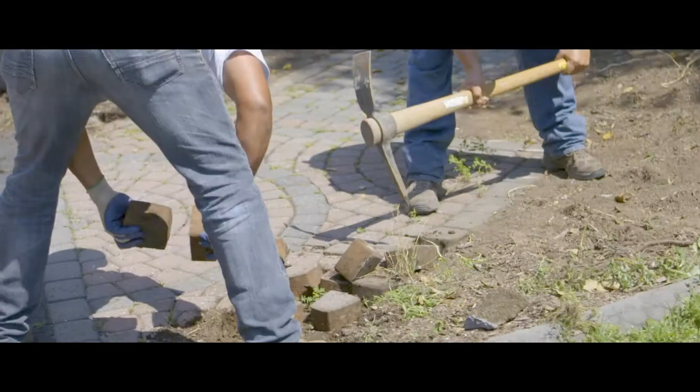We're going to begin with demolition and excavation and get this job rolling. All right, fired up.

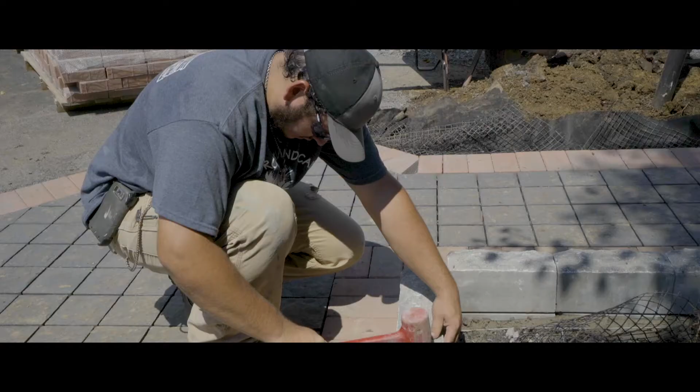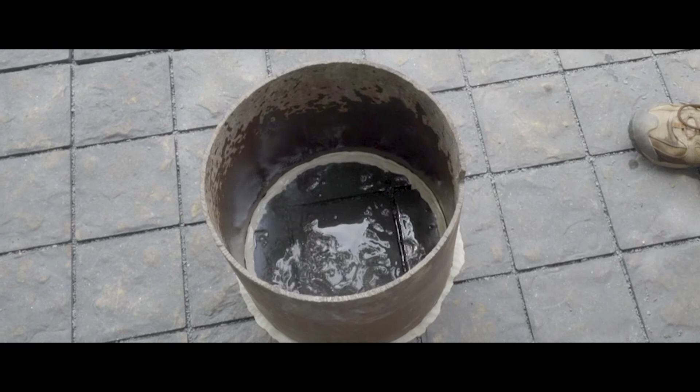You're sitting in the audience, you're thinking, oh my God, they're going to talk about permeable pavements again. Are you kidding me? We can't sell permeable pavements in our market. Why are they talking about it again? Well, let me give you some advice. Stop trying to sell permeable pavements. Just stop. Get to the explicit need. Talk to your consumers about their problems.

I sat with this lady in Reading, Pennsylvania, and I said, how can I help you? She said, I walk off of my front porch, I step onto the walkway either into water or ice. Can you solve that for me, Paver Pete? Yes, ma'am. She points to this tree in her front yard, and she says, this tree has no value to anyone other than us, because we planted it, our kids, us, we planted it together. I would like to save the tree. Can you save the tree, Paver Pete?

Yes, ma'am. She goes, it's summertime. I would love for you guys to be out of my front yard really quickly. Can you do that for me? I said, yes, ma'am. And I did it with permeable pavement. I was in and out with the walkway installation in one day. All the plantings took us a second day, 2 days, in and out. We solved all her drainage problems, and we preserved her tree, and we did it with permeable pavement.

I didn't sit down and discuss angular stone with 90% fractured face, less than 5% passing the two hundred. Because she doesn't care. She doesn't. Can you solve my drainage problem? Yes. Can you save my tree? Yes. Can you be in and out in a day or two? Yes. That's permeable pavement, folks.

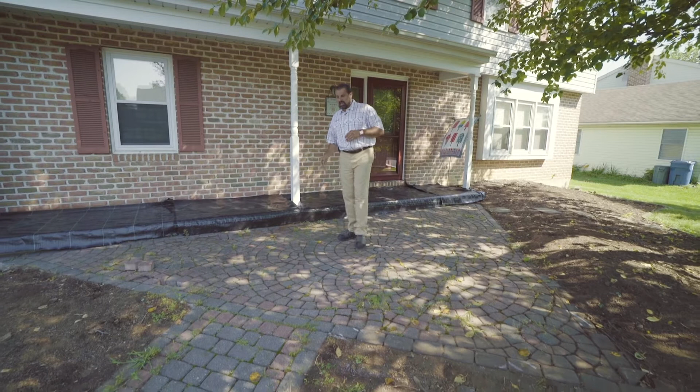The contractor loves that. It's busy season, and this walkway, step, and stoop can be done in 1 day's time. An additional day will get all the landscaping done. The layout, we're going to work with our existing grades and pitch that water down, most of it going through the subgrade. You can see some failures around this site. We're going to deal with those.

We have the root zone system over here. We have some edge failure and a couple of fairly significant sinkholes. This was done on all stone dust or screenings or quarry waste, which has eroded away. We're going to solve that problem for them as well. So we're going to start with excavation and demolition and get this job started.

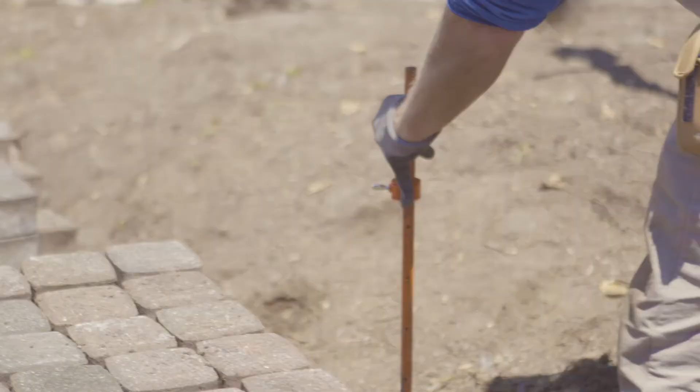How many of you guys have seen things like this on your projects? Put your hands up. How many of you have seen a job like this? All of you, put your hands up. How many of you guys take these pictures of these failures and show them to your homeowners, your prospective clients, and say, buyer beware? Think about that one. How many of you in this room have a section of your website that says, buyer beware?

This kind of work is being done in Connecticut. Can I get an amen? Can I get an amen? And how do we stop it? How do we stop it? We sit at a kitchen table and we try to talk to those homeowners and explain that we'll be different, we'll be better, you pay me more and you'll get more. And they go, you're lying to me, because they don't know you.

Start showing them pictures like this. Don't tell them who did the work. They don't need to know. You don't need to get into that game. But show them these things and say, this is being done. We don't build it this way. This is why it occurred. Here's how we're going to solve it.

Now, we have cross-sections that can help you. We have cross-sections. Everybody has a handout. So this is your typical permeable pavement system crosscut. And obviously in this system, we got to put our 2 and 3 inch ballast stone, because this lady has her pet elephant or her railroad track she wants to build down her front walkway, right?

Yeah, ridiculous. So what we're saying is, let's make that 2 and 3 inch ballast stone optional.

Am I up on the screen? Yes, I am. Excellent. Yep.

So for the first time ever, the industry doesn't say it, none of our competitors say it, no one is saying it, but the 2 to 3 inch ballast stone is an option. We're building a residential walkway in Reading, Pennsylvania. We don't need ballast stone. But what if we did need additional strength? What if we did have to handle repetitive elephant traffic load? That would be crazy, but let's just say, what could we do to make this pavement stronger, Chris?

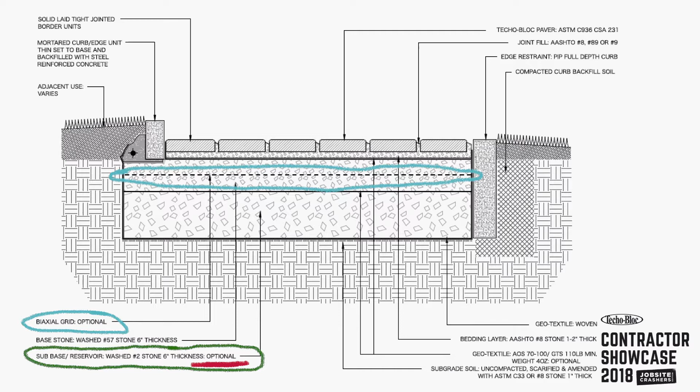We're saying let's integrate some biaxial geogrid into that base to add structural integrity to that system. So sandwiching a layer of biaxial geogrid in our base, we can make this strong enough to handle repetitive vehicular, truck, whatever we wanted to do here. Okay, I like that. Show me another drawing.

Who knows? 50-year storm. 2, 3 inches an hour? No, not much more than that. 50-year storm, what is it? Tell me, I don't know. Huh? Let's say 4 inches an hour. That would be a lot. I think that's too much. But let's say you get a 4-inch rain event. 50-year storm. What's going to happen, Chris?

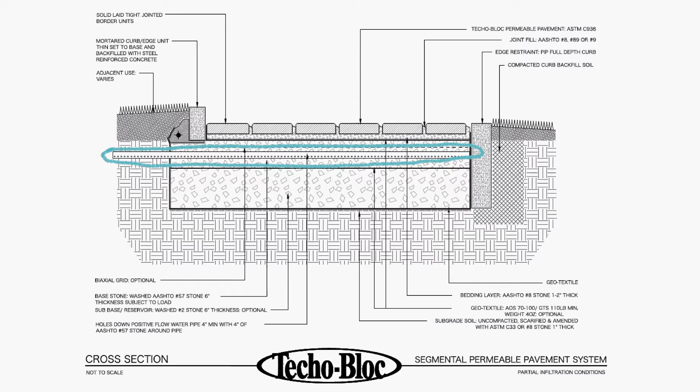We got rain in the environment, right? Rain's coming down. It saturates the joints. It eventually fills into our base, right? That's rain. Is that rain? Those are raindrops. I will take the pen from you. You realize that, rain, right? Okay. And then that water will fill into our subbase or base, and it will infiltrate naturally into the soil. It'll recharge our water table. It'll be absorbed into root matter and evapotranspirate back into the environment.

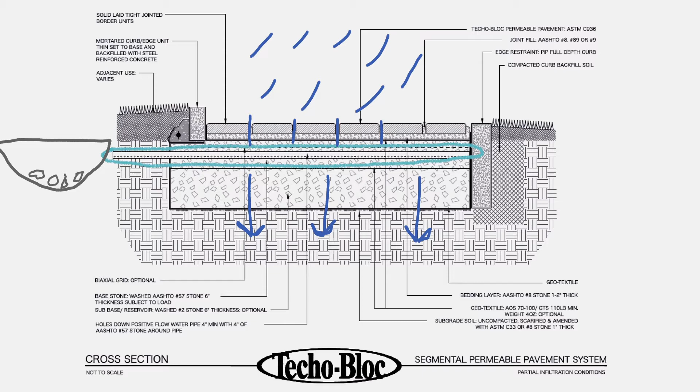But let's say we get a 100-year storm. Muscle man, how many is that? 8 inches an hour. Let's say a 150-year storm, 12 inches an hour. Now what do we do? System can't handle it, can it? So now we're going to let that water back up into our exfiltration pipe. We can build an adjacent subterranean drainage structure like a dry well, and that dry well, full of clean stone, can now absorb and let that water evaporate or evapotranspirate back out into the environment. Show me another drawing, please.

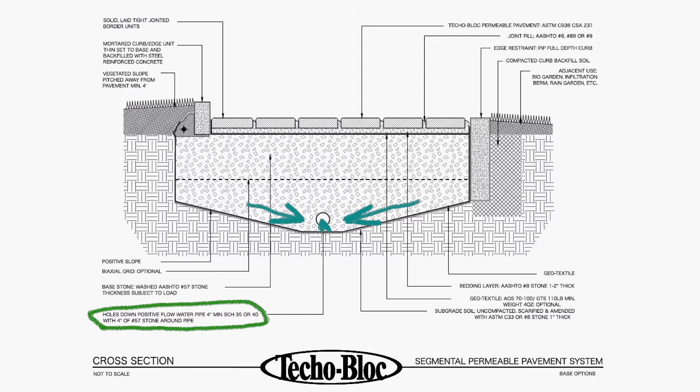Nice thing about that is that dry well isn't dug to China, too. Who's ever seen a permeable pavement like this? A pitched subgrade with an exfiltration pipe in the lowest grade point. Holes down, 4 inches of clean stone completely around the pipe, right? Holes down. All this is loaded up on our knowledge-based website. So now we get a rain event, all 3/4 inch angular stone, no subbase in this drawing at all, 1 layer of biaxial grid. We can do a lot of things with an application like this. Show me another one.

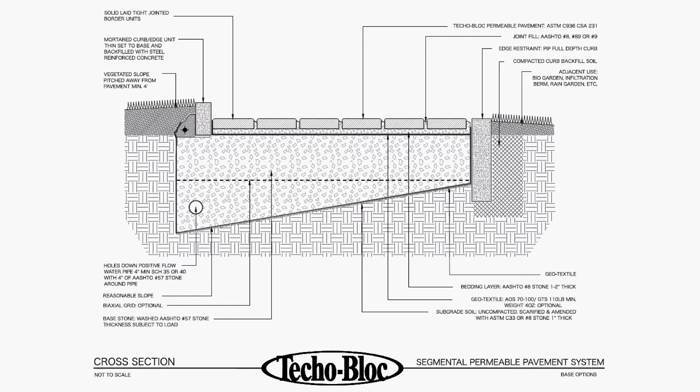Uh-oh. When would you build this? When would you build something like this? What would be over here on the right side of the screen that would make you build this way? A house is the correct answer. Are you drawing a house now? Yes, sir. Oh, goodness. I'm taking the pen. What would we have to do against that foundation wall? Because a lot of manufacturers are talking about open graded stone in every application, which is wrong. What would we have to do, Chris, against that foundation wall?

We could lay an EPDM liner up against that foundation to make sure no moisture is getting into that foundation. So we would have an EPDM liner extending up the foundation and 6 to 10 feet out. So there's an expense and time and labor that goes into building a permeable pavement against the foundation wall that a lot of people aren't talking about. So if you had one, you need that EPDM liner.

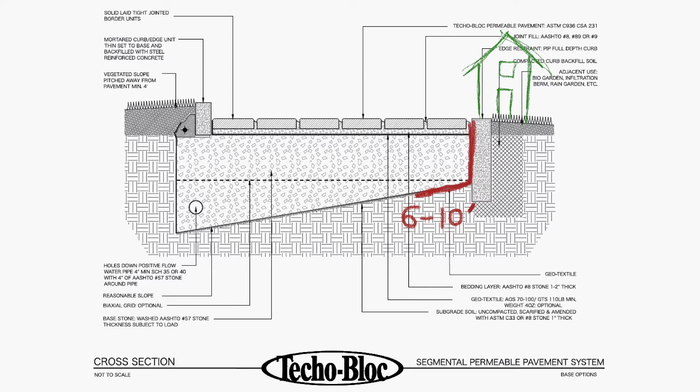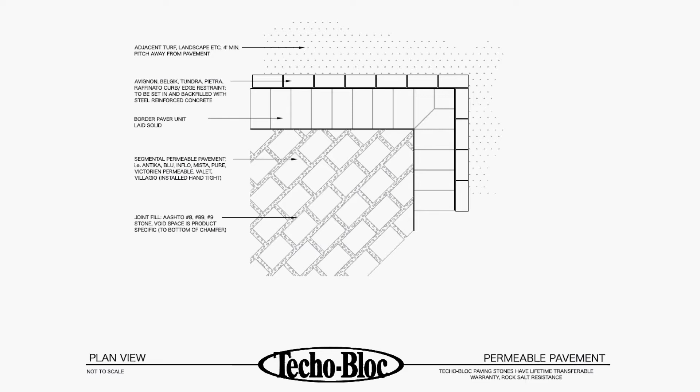Show me one more. So we are the only manufacturer in the industry that are still recommending a solid laid header or border course around our permeable pavement systems. So laying a true interlocking system around the perimeter and an elevated curb system, right, is a part of the erosion and sediment controls so that wind-blown debris, leaves and Dunkin' Donuts lids and cigarettes, whatever, but is that debris?

Those are leaves and debris. Okay. Yep, that's it. All right. I'm guessing that's debris. Okay. Now we can sweep that into a pile, shovel it away, no problem. We haven't contaminated the joints of our system. So we can reduce the amount of maintenance a permeable pavement sees by designing it properly from the beginning.

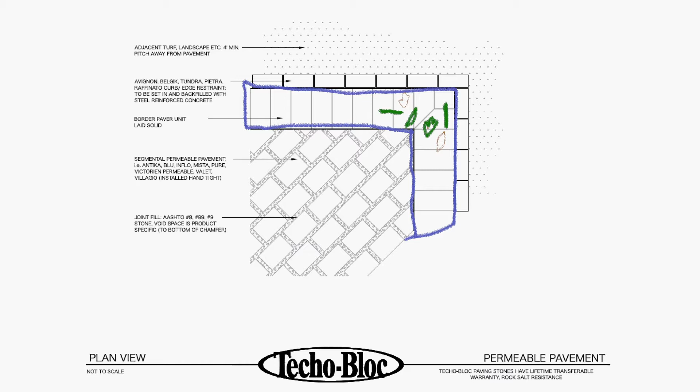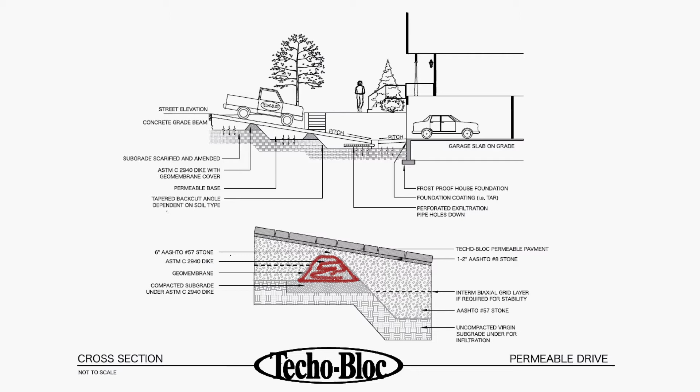Show me the next drawing, please. What's this one? So this is a downward sloping driveway into a garage. So we need to build some elevated dikes in that subbase to stop that flow of water downward into the house. So elevated dikes, excavating to the angle of repose of the soil. We've got little landings the water can infiltrate naturally. Anything that does overflow, we'll catch it in an exfiltration pipe and we'll run it off.

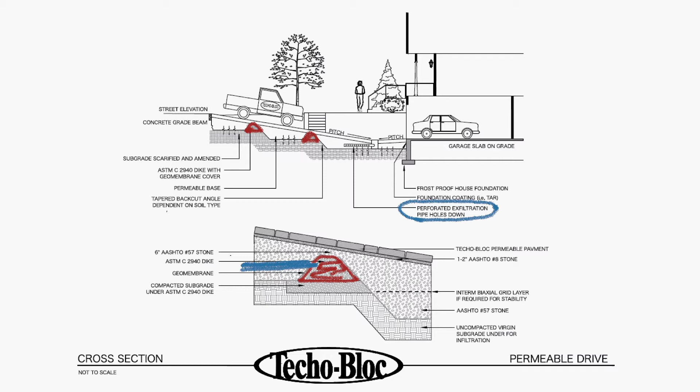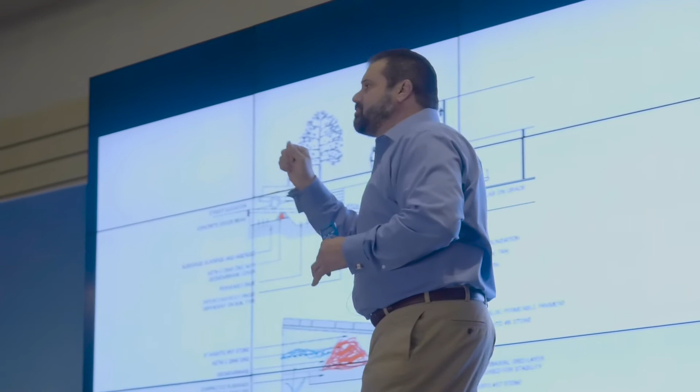Folks, all of these are loaded up on our website. Go there, download them. Drop your logo in the upper right-hand corner. Laminate them. Get some colored markers. Keep them in your backpack. Keep them in your briefcase when you're sitting at a kitchen table. Don't bring them all out. Bring the appropriate ones out. Explain to the consumers what they're buying, and believe me, they'll pay for it. They understand what they're paying for, and they will come up with the money. These are great drawings. Put me back up on the screen, please.

Okay, scarification of subgrade. All right, fired up. Our excavation's done on our permeable pavement walkway. We've dug down that 9 3/8 inches. We have scarified that subgrade. We've used a tooth bar on the front end of our loader to scarify that surface. Our intention was to go down that full 4 inches. But due to the high clay content of our soil subgrade, we weren't able to do that. The soil's just too cohesive. So we've gone down 2 inches. Why are we doing that? That opens up the surface to allow for a greater rate of infiltration.

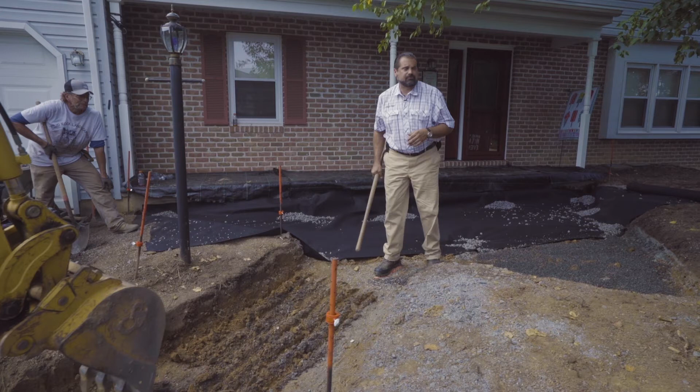Come on, guys. Now we're bringing in our number 8 stone. This is our filtration medium. It's going to catch any of the fines that may travel through our system and catch them before they clog that subgrade. It will also help our bearing ability and our rate of infiltration. Once that's done, we'll finish up our geotextile fabric. You can see it's shingled with the flow of water. It's tensioned with piles of stone. Never put holes in it. That's an Alliance geotextile fabric. It has an apparent opening size of 70 to 100 and a weight of 4 ounces. That's what you want to use in a permeable pavement under pedestrian traffic. Let's keep going.

We get out to the job sites in the springtime and we're building an interlocking pavement, and it's just wet and the clay's so mucky we can barely walk around. It's just sticking to our feet. We know what to do. We can add clean stone to it. We can add number 57 3/4 inch angular stone, change the gradation, help dry out the clay. It's called a gradation amendment. There are chemical amendments to clay subgrades as well in an interlocking pavement application. Give us one. I think the best is lime. Go to lime.org if you've never been there to look at how you have a change in the positive-negative attraction of clay particles to water molecules and how it dries them out. There's others. Like type S mortar mix, maybe? Yep, Portland cement, lime kind of mixed together.

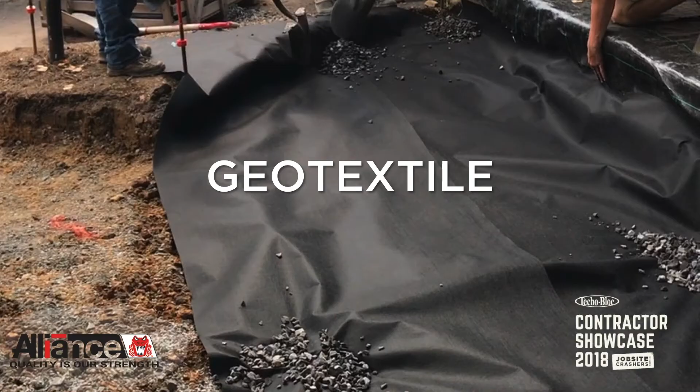Now, geotextiles. There's a lot of misinformation about geotextiles and permeable pavements as well. Everybody welcome Kyle Moyer to the stage, please. Kyle.

Now, a lot of us feel that we can only use the non-woven geotextiles in a permeable pavement. They look like felt material. And if you hold them out and you pour water into those felt materials, you can see that the water dissipates very, very quickly. But in a vehicular traffic application, there are times when it would be better to use a woven geotextile fabric like this one. It has what's called bilateral tensionability. It can bridge minor differential settlement of the subgrade just due to the nature of it being woven. But a lot of us get scared. Wait a minute, this is a polyester hydrophobic material.

Polyester like Chris's pants.

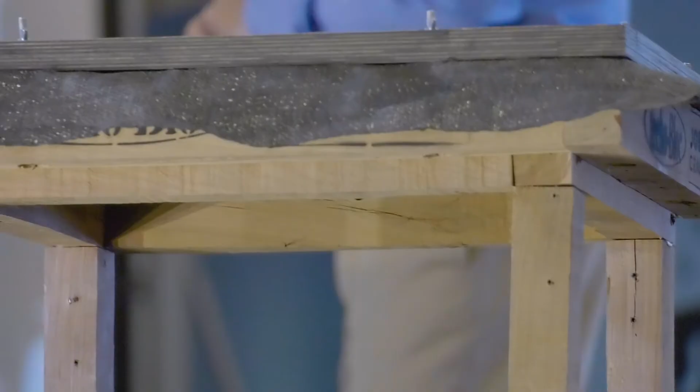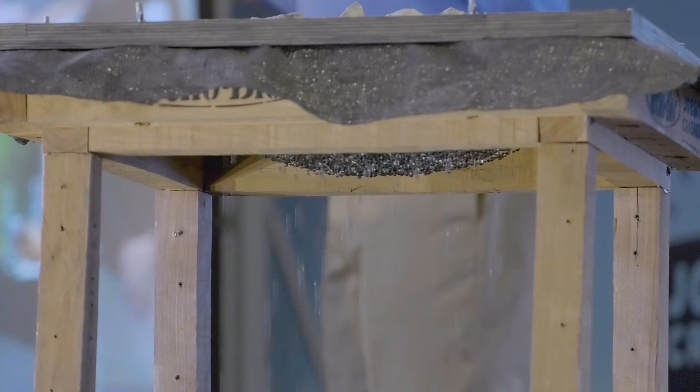That's making a visual observation and saying yes or no on a fabric. That's not how you do it, folks. You've got to look at the apparent opening size of that fabric and find out, will it work in an application where it is subject to the load of aggregates and subject to the load of pedestrian or vehicular traffic. And under that load, you can see that that water, once it comes in contact with that stone, that fabric opens up and the water dissipates very quickly. It may look like silt fence, but it is not silt fence. It has the appropriate AOS or EOS and can be used in permeable pavement applications.

Kyle, thank you very much. Give him a round of applause, everybody.

We spec geotextile fabrics based on data, not on visual observation. Put me back up on the screen, please. Okay, let's look at geogrids and how they work in pavement.

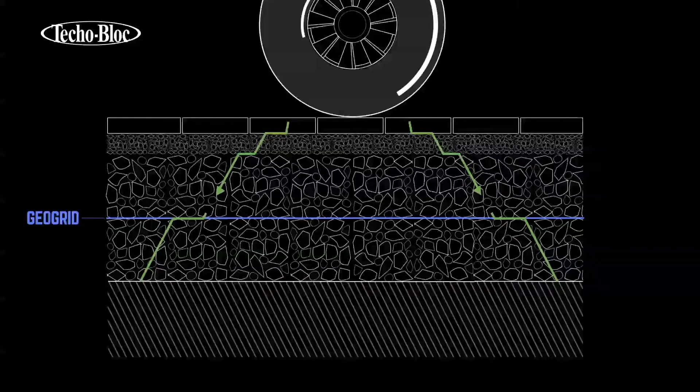You're sitting at a kitchen table, and you're talking to the husband and wife about building them a backyard patio, a driveway, or whatever it might be, and you start talking about biaxial geogrids, and the benefits of biaxial geogrids and how they can make that pavement stronger and get them a better life cycle. And those homeowners are looking across the table at you going, what are you talking about? I've had 3 other contractors come in here to bid this project, and not one of them has even said the word biaxial geogrid. I think you're trying to cheat us and get more money out of it. That's what they're thinking. That's why we created animations like this, folks.

This is loaded up on our YouTube channel. Download it. Put it on your iPhone, your Android, your iPad, your computer. And when you're sitting there talking to them about incorporating biaxial geogrids in pavement, show it to them so they understand the conical distribution of load. And what you're telling them is very important.

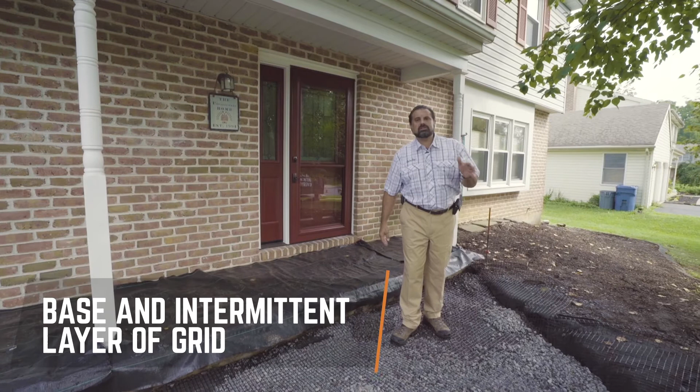Compaction, compaction, compaction. That's been our mantra in the hardscape industry. But when using open graded stone or permeable base, commonly called ASTM number 57s, 3/4 inch clean, angular, symmetrical material, little to no compactive effort is needed. In this application, in this environment with a deep frost line and lots of freeze thaw cycles, our typical base would have been 9 inches.

We don't want to do that. We're going to be able to save money for the consumers and get in and out of this job quicker with a 6-inch base. To make sure it's plenty strong, we've incorporated a biaxial geogrid, an Alliance Gator grid, what's called 30/30. These biaxial grids are installed, no overlap, only abutting, with 100% coverage. Biaxial geogrids have changed the way we hardscape.

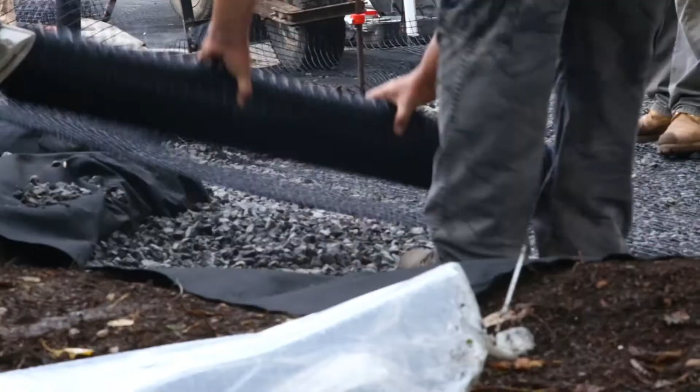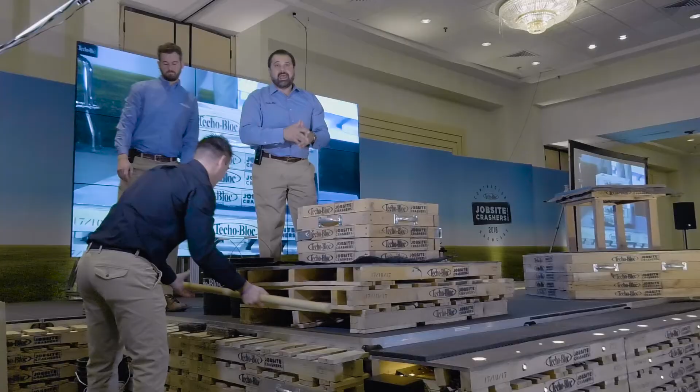For those of you who are old timers, you probably have seen this little test. Those of you who are newer to the business, this is something new. What we're going to do is we're going to show the bearing ability of aggregates with and without the use of biaxial geogrids. So we're going to take this box, which is hinged on 2 sides, and we're going to fill it with stone, and we're going to put weight on it, and then we're going to see how it handles that weight, encapsulated and not encapsulated.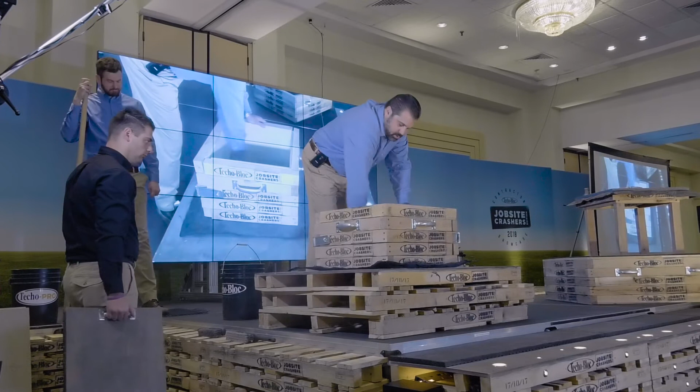We're going to use a 3/4 inch angular stone. We call it number 57 stone. This stone, in my opinion, requires no compactive effort. If you do compact it, just do it very little. You can tend to break the angular nature of the stone, change its gradation, and reduce its bearing ability by over compacting it. I'm going to put 2 5-gallon buckets of stone, no compactive effort at all. I'm just kind of flattening that area out.

And I'm going to put this little platform in here so we can subject it to load. We're going to use this pipe because I had my hip replaced about 9 months ago. So I don't want to risk anything. Thank you very much. So now I'm putting my weight on it. I weigh 145 pounds.

All of a sudden, I'm funny. Do you see that?

I weigh slightly more than 145 pounds. And you can see that this stone very easily bears my weight. There's no movement, there's nothing. It is encapsulated, in this case by a box, but it would be trench walls. So you can see that I am very stable in this application.

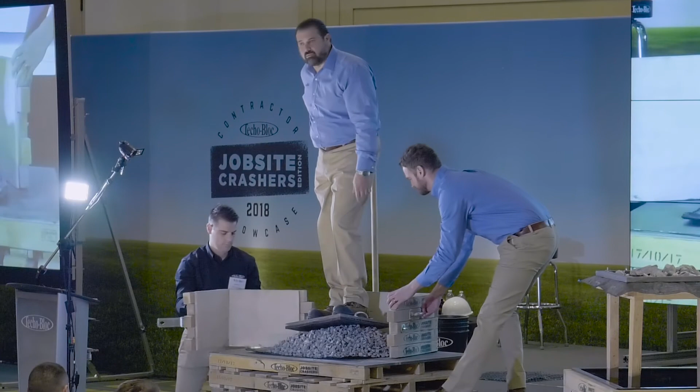Now, these guys are going to unhinge the box. They're going to pull one side of it off, and they're going to do it slowly, because as they move the encapsulation off, and you can even slide that. You put that on the ground, Kyle. You can see that the more they move it, that aggregate finds its own natural angle of repose, an angle at which it is stable on its own without those trench walls. Okay, let me get down off of here.

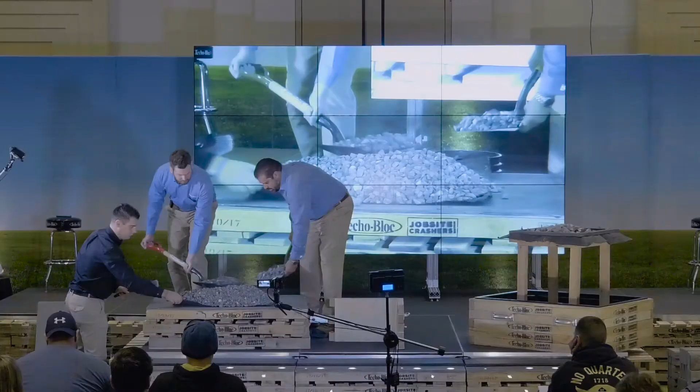Now, we are going to do the same test again with the inclusion of biaxial geogrid. We're going to use the same stone again. We do have plenty of stone up here, but I don't want anyone to think that we're pulling a fast one. This is just clean stone. So we're going to use the same stone, second time. All right. Chris will get that. Let's go on this side. We're using the same stone. Nobody will think we're pulling a fast one. Same material.

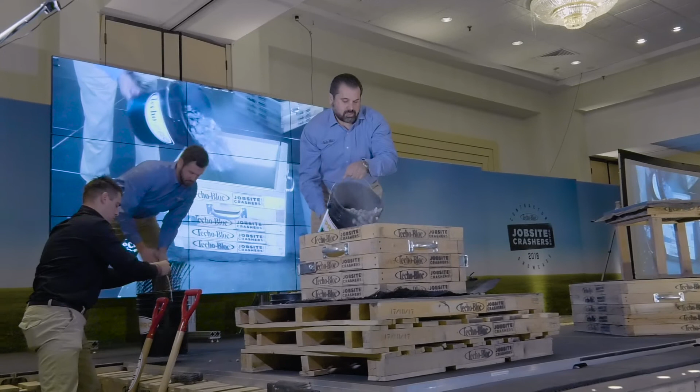We are using a geotextile fabric. Can you get the shovel back up? We are using a geotextile underneath. The reason we're doing that is you'd have a geotextile anyway. And we're going to rehinge the box and do the test all over again. This time we're going to do it with 33% more stone. We're going to put a third bucket of stone in here. Okay? Cool. So now, starting to put some stone in. Again, no compactive effort.

I have a layer of biaxial geogrid. It does extend up the sides of the excavation just a little bit. That's okay. One thing we don't want to do is have geogrid overlap geogrid. Geogrid never overlaps geogrid. Geogrid has what's called apertures or openings. Anytime that it overlaps, you reduce the size of that opening or aperture and reduce its strength and increase its friction plane, which is not how it works. We want to have that friction.

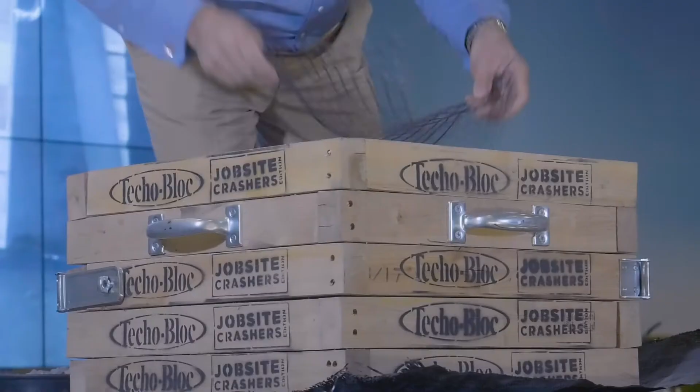This is a biaxial geogrid, which means it has strength in two directions. In a retaining wall, we use uniaxial geogrid, which has strength perpendicular to the wall face. Why don't we use biaxial grids in retaining walls? Well, it costs more and we don't need the strength, unless we're building steps, or maybe have a return wall.

All right, we got two more layers. We got one more bucket. Now we're again using a third bucket of stone, more material. Three inches is a really good number for the amount of stone between layers of geogrid. 3 inches of stone. Anything less than that, you're really not getting the same benefit. So now we're at 33% stone, no compactive effort. Put my little plate back on there.

Once again, 145 plus pounds. And you can see there's no, but it's encapsulated. So you can see that there's the same strength, the same integrity in a trench with this stone, with or without the geogrid. Now we're going to unhinge the box. Go ahead, guys. They're going to pull it out slowly.

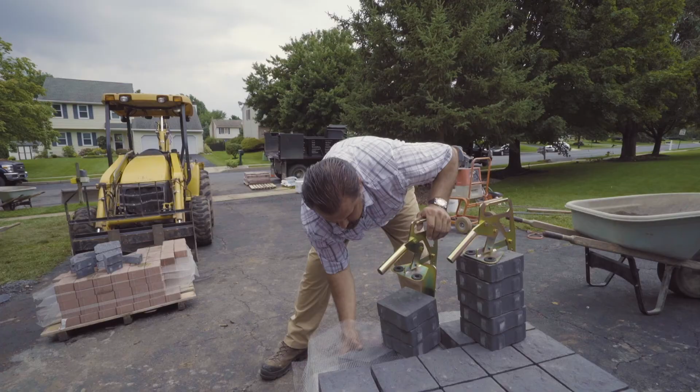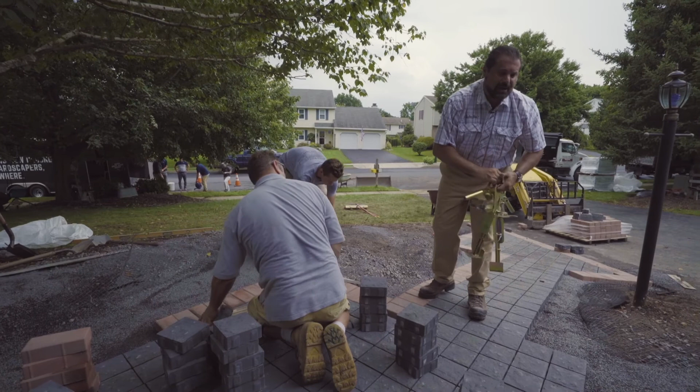We learn by doing. After carrying pavers for many years by hand, scratching up the inside of my arms, ruining my shirts, figured out there's a better way. Carrying 10 pavers at a time to the laying face. Very quick, very efficient. Spin it out, grab more pavers. Our bedding layer's in. It's a 1-inch number 8 stone bedding layer. It's screeded, doesn't need any compaction. We can lay right on that surface. We're approaching completion on our permeable pavement install.

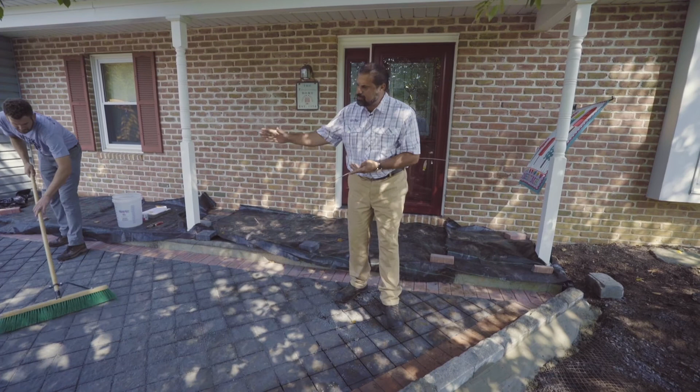As you can see, we've used our Victorien red black in an interlocking application as our border or header course around the project. The reason for that is sometimes you'll get wind-blown debris from the leaf-shedding trees, the environment, and they will build up against that edge, easy to shovel and remove without contaminating the joints on our permeable pavement system.

We're also using our Avignon as an elevated edge. It is also a component of our erosion and sediment control measures. It's set on the base with a slight mortar bed and then backfilled with steel reinforced concrete for integrity. That elevated edge will keep all the mulch and debris out in the environment where we want it.

Now we're using a Dur-O-Wall type product. Here you go, Rob.

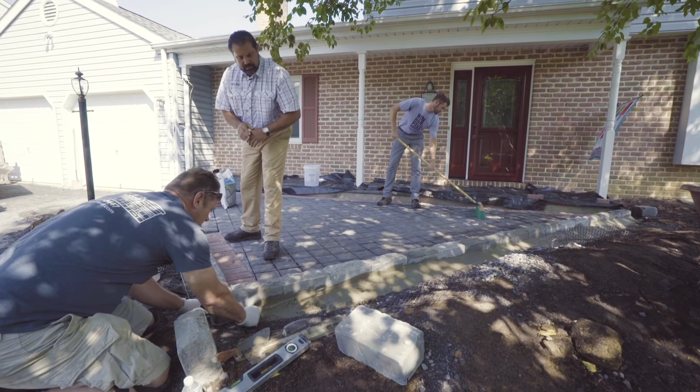And we use it as opposed to rebar. It's very easy to bend. We're going to put plenty of overlap on it. And that steel is going to give us the strength that we're going to need in a deep frost line or a lot of freeze-thaw susceptible soil conditions environment. I'll bend this over here. Once that unit is bent, we'll be ready to backfill with concrete and we'll be good.

Our joint fill here, you see sweeping into the joints, is Alliance Aqua Rock. It's a number 9 base stone. It's hardness tested. The material is symmetrical, no flat elongated particles, and less than 5% passing the 200 sieve. We want to sweep it in to just below the chamfer. We're going to check to make sure that it's completely consolidated in full using a putty knife test. If I can get more than 1/2 inch penetration with that putty knife, then I know I need to re-sweep and reconsolidate. But we're good here.

We affectionately call this the Techo-Bloc Permeable Pavement Cheat Sheet. It is loaded up on our knowledge-based website. Upper left-hand corner, you see our logo. Below that, Blu 60 and 80, our #1 best-selling product, is a dual-purpose product. Can be installed permeable or interlocking. Below that, something new. Blu 6.5x13, we've done the testing. It is now rated for permeability.

So 60 and 80, herringbone pattern, running bond pattern, stack bonds, Blu 6.5x13, Antika, Victorien Permeable, Villagio, Mista, Pure, Inflo, Valet, you know about them, 3 new ones: Mika, Travertina Raw, and Aquastorm. And another big change, percentage void space installed. We have traditionally given you percentage void space manufactured as it comes out of the mold cavity. That's just not realistic. So this is better real-world data. That's what we're giving you.

Joint openings, rate of infiltration. The bottom 3 are brand new. I don't have those yet. We'll get them soon. Joint fill. Then you see that little blue logo. That's the ASTM, the American Society of Testing and Materials. It's the U.S. standard for permeable and interlocking pavement. Do we pass that? Yeah, quite easily.

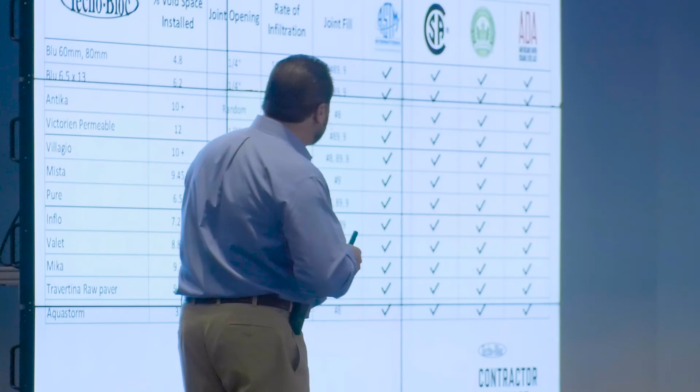The next one is CSA. That's the Canadian Standards Association. What's that mean? It's the most strict testing you can do in the world on pavers. So, freeze-thaw durability in salt water. Do we pass that? Yeah, pretty easily. USGBC, the U.S. Green Building Council, and LEED accreditation, Leadership in Energy and Environmental Design. Do you get points for using our permeable pavement systems?

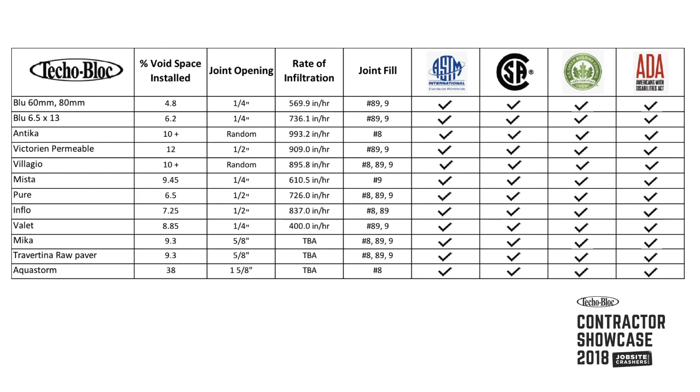Folks, all the data you get from Techo-Bloc is real-world data. The rate of infiltration on Valet, we got it on that little walkway in Reading, Pennsylvania. No indoor, controlled-condition testing from us. So remember, scarification of the subgrade increases infiltration. Do that back drag with your bucket. Open up that infiltration rate of that soil.

Geotextile and permeable pavement. We no longer pick them with visual observation. We need to know grab tensile strength, 110-pound minimum, weight 4 ounces, and an AOS or EOS, apparent opening size, equivalent opening size of 70 to 100. That's the thread counts per inch. That's how we make the decision.

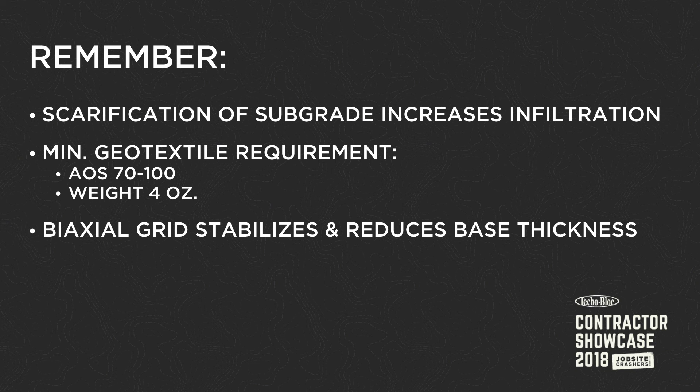Incorporating biaxial grid stabilizes and reduces base thickness. You guys saw the demo up on the stage. Incorporate some of that biaxial grid into your base to increase structural integrity. We've been doing this kind of thing in pavement for thousands of years, and we stopped. I don't know why. We're bringing it back. Start using grids, start using fabrics. When appropriate, let's reduce our base thicknesses.